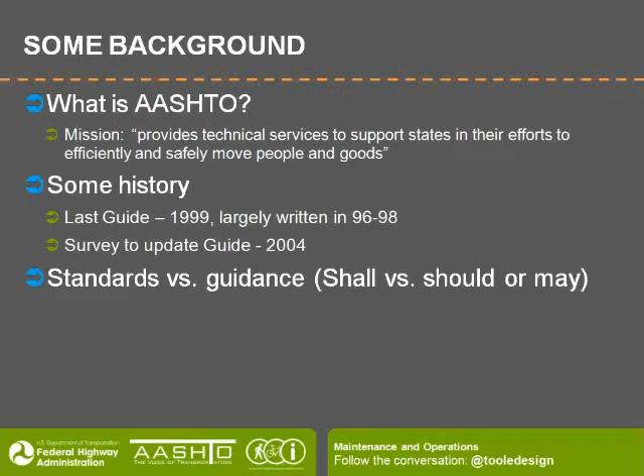Now, the relationship to other manuals: the MUTCD, Manual of Uniform Traffic Control Devices, provides guidance and standards on signs, signals, and pavement markings. And much of this, as they relate to bicycle facilities, is incorporated into the 2012 AASHTO Bike Guide. So they are compatible with each other. AASHTO Guide does elaborate on a number of design treatments. And AASHTO does not get out in front of the MUTCD on signs, signals, and pavement markings. For that reason, there are some new treatments that have not yet been approved by FHWA that aren't in the guide.

And the PROWAG guide is worth mentioning. It does apply to shared use pathways, and Tom will be talking about the proper maintenance of shared use pathways, which is critical to maintaining accessibility. And lastly, the Highway Capacity Manual is another valuable resource. Maintaining pavement quality is certainly a factor that's used in determining level of service, which the Highway Capacity Manual is concerned with.

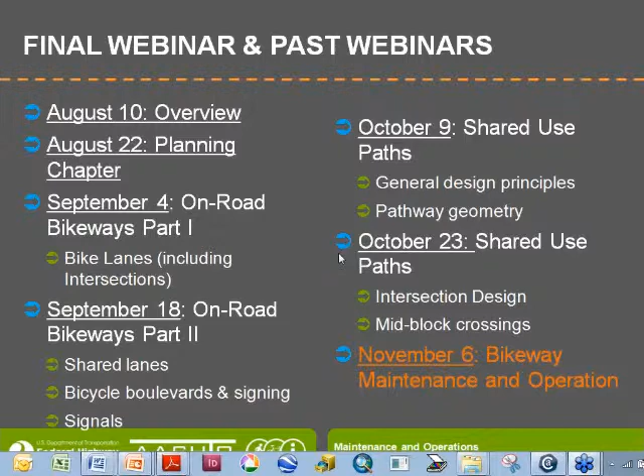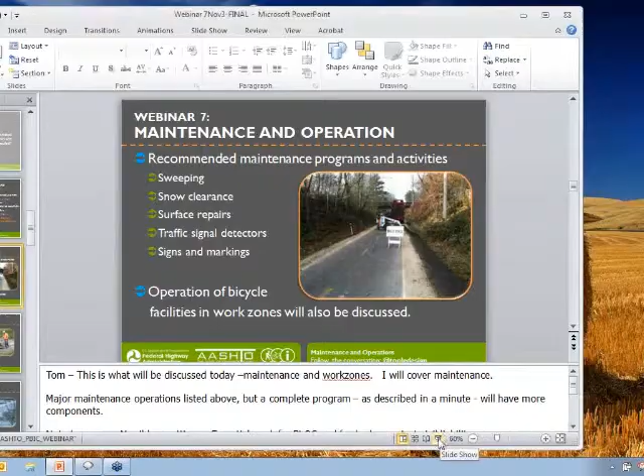Okay, Tom. Okay. Okay, can everyone see my, or Michael and James, can you see my slides? Yes, we can. Very good.

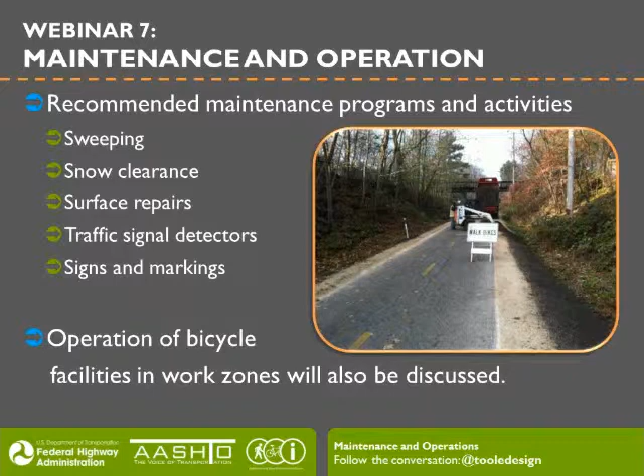These are the last 2 components of a maintenance program, including utility cuts and snow clearance. More and more communities are keeping paths open year-round. That means snow removal in those snow belt states for the bike lanes and the paved shoulders and the paths. Again, this is essential work, but the street departments don't get awards for maintaining facilities through the winter. They probably receive far more complaints than they do compliments.

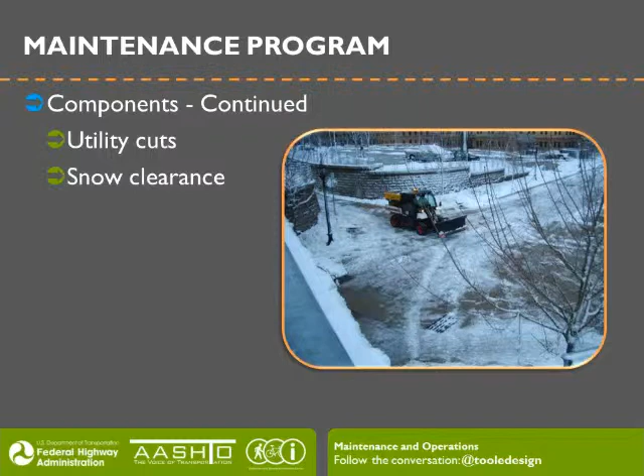So let's go through each one of these components, starting with sweeping. I should note that sweeping is sometimes necessary for light and dry snowfalls as well. But typically it's because debris builds up in the bikeway, or sand and salt, which is certainly a menace. Sand and salt is really kind of a love-hate ordeal for maintenance workers. It's necessary to cut through the ice, but it turns into a problem in the spring when it needs to be collected and removed from a path or the shoulders or bike lanes.

Silt is another problem. It happens where there is poor drainage, and wet silt is especially slippery. I think it's just about as slippery as ice is. Regarding fallen vegetation, leaves falling on a path in the fall can produce a really nice photo, but again, they are very slippery when they're wet and they need to be swept off of a path.

So here are the solutions. You can establish a regular sweeping program, and the AASHTO guide recommends that. Along with that, you should have a reporting system in place as well. And the less regular your sweeping program is, the better that reporting system should be.

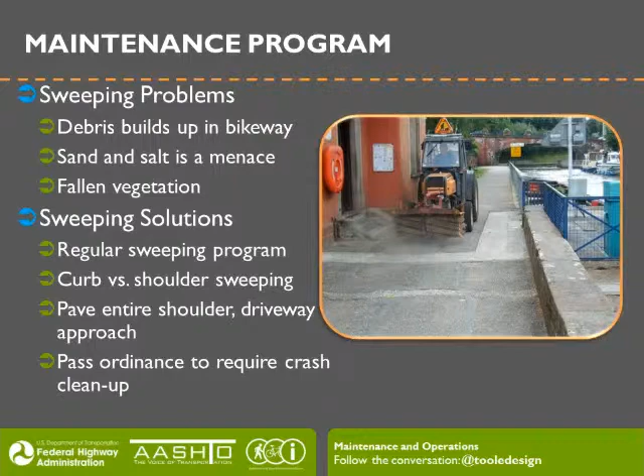Lastly, the guide talks about the need to perhaps pass an ordinance that would require wreckers that haul away the remains of crashes to clean up after the crash itself, so that there's a lessened amount of debris.

Moving on to surface problems, these are likely to present some of the most serious hazards for bicyclists. These problems extend beyond bikeways and include paved shoulders and travel lanes. Longitudinal cracks, for example, may present a very serious problem to a bicyclist, but not to motorists in roadways or bike lanes.

The main surface problems include cracks, potholes, and bumps. Often the pavement just deteriorates over time - that will eventually happen. So surface repairs start with an inspection and reporting system and often end with patching, grinding, and spot pavement replacement. If you're starting up an inspection and reporting system, it's very critical to be emphatic about the importance of that system. That goes hand in hand with any maintenance program.

If you use good construction standards, you can avoid or significantly delay the onset of problems. Design has a place as well - it can really reduce the cost of maintenance in the future. For instance, if you design a roadway and keep that joint out of the bike lane, there will be far fewer reported problems in the future.

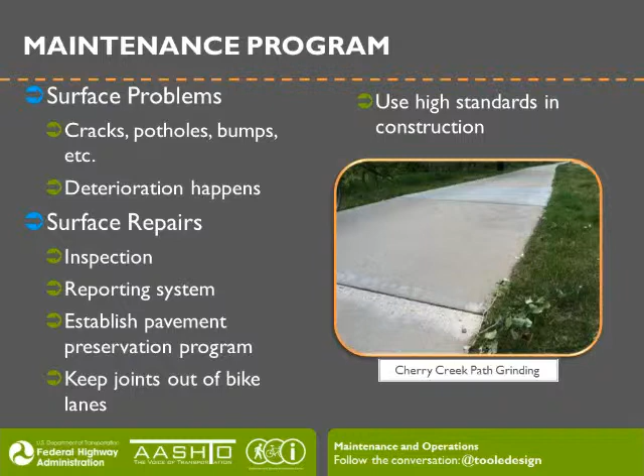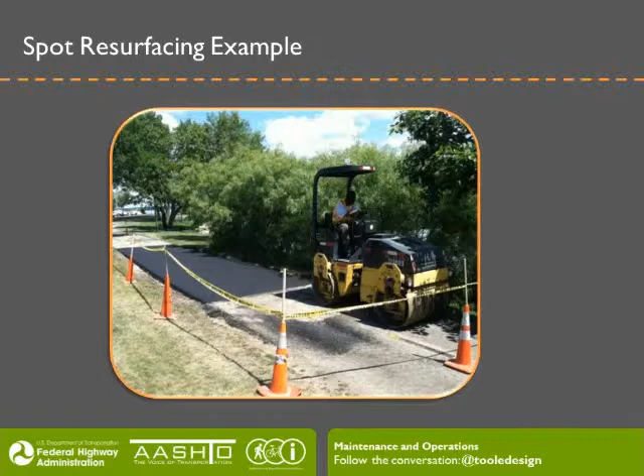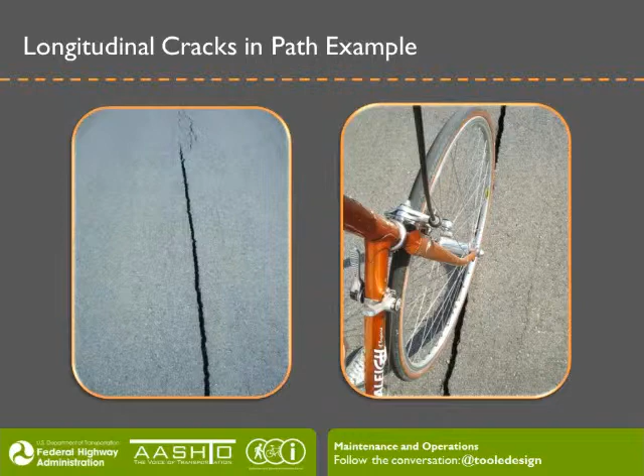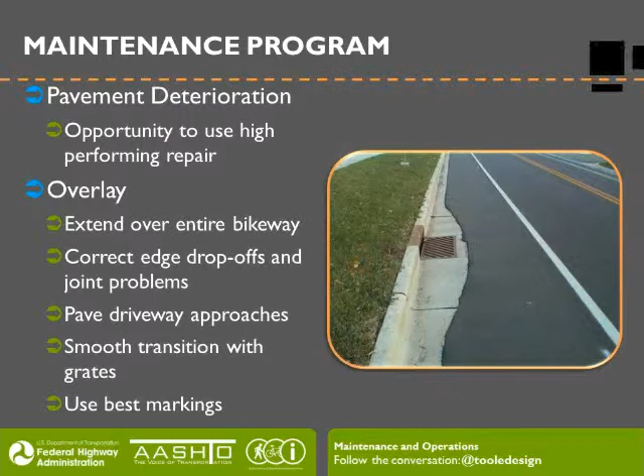Moving on to simple pavement deterioration, this tends to be a significant problem, but it's also an opportunity to use a higher performing repair. Overlays provide this excellent opportunity, but keep these tips in mind: extend the overlay over the entire bikeway, correct the edge drop-offs and joint problems, pave the driveway approaches if they're in gravel, ensure smooth transitions between the grates and the surface itself, and use this as an opportunity to use the best markings you can afford at the time.

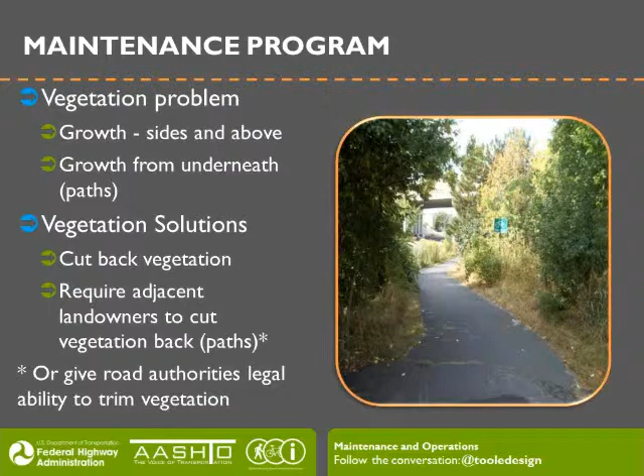Vegetation encroachments seem minor, but they can present serious hazards, often impacting bicyclists on shared use paths. Maintaining authorities are typically pretty good at keeping vegetation under control on highways themselves. Growth comes from both sides and above, but it can also come from underneath the pavement. Solutions are simply to cut back the vegetation or require adjacent landowners to do so. One problem impacting some areas is the authorities' inability to trim vegetation if the source is from private property, so you may have to give authorities legal ability to trim the vegetation, as suggested by the guide.

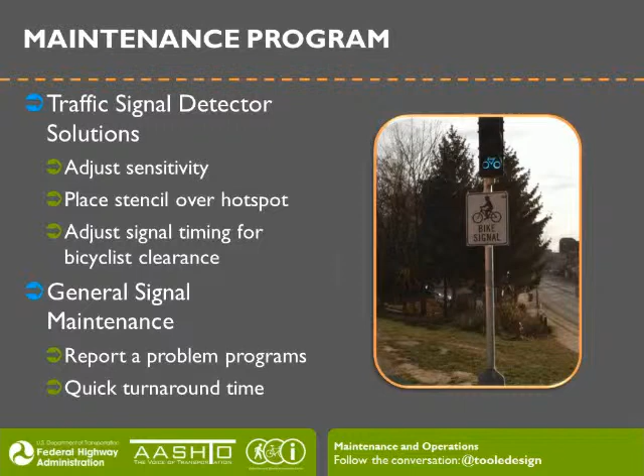Signs and markings also require maintenance, and here are some of the solutions. First, inspection, including testing for retroreflectivity, is necessary. The solution is replacing signs and markings routinely. For markings like crosswalks and long lines, when overlays are done or a street is reconstructed, use the best marking material available.

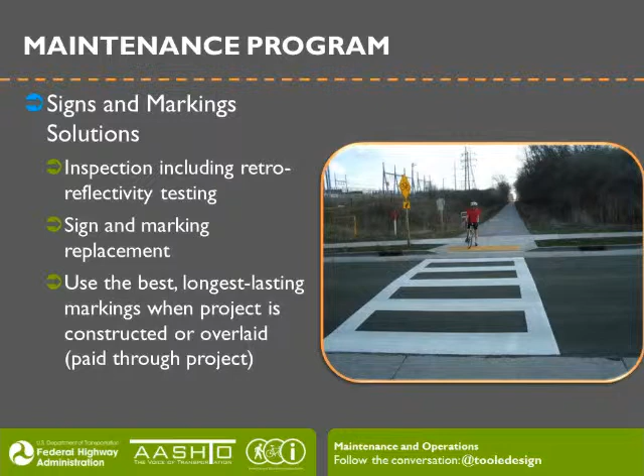Markings are often covered by project funds, constituting just a small part of the project. Meanwhile, maintenance budgets are very tight and often being reduced. So try to get the longest lasting marking material when you have a reconstruction or resurfacing project.

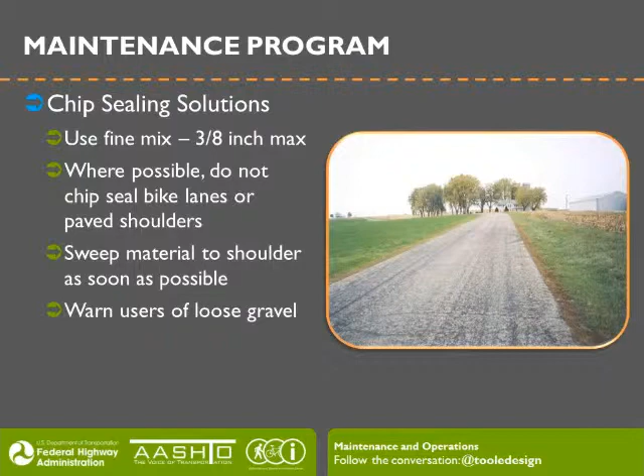Last but not least is snow and ice problems and maintaining paths and other bikeways for year-round use. The issue is usually with snow or ice that remains for more than a couple of days. For example, it was snowing earlier today in Madison, and no one was rushing to remove it because it was melting right away. The problem is with snow and ice that hardens and becomes a safety hazard, or impedes the movement of bicyclists and pedestrians.

So the solutions are to remove the snow and ice, often using salt and gravel or salt and sand to help reduce and remove that ice. Parking restrictions often have to be put in place so you can plow right up next to the curb when you have bike lanes next to parking lanes. And you need a reporting system in place so you can respond to problems and hazards that crop up. That's it.

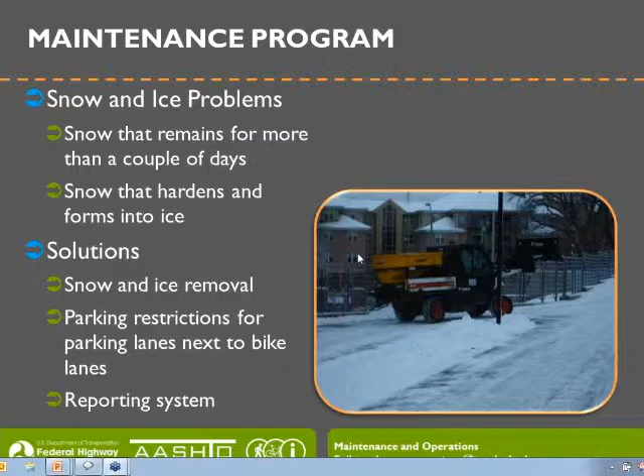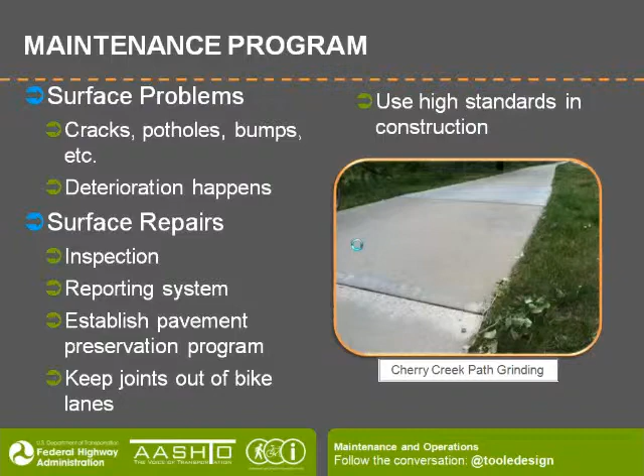Operating bikeways in work zones. This is a part of the guide that has been significantly beefed up, and it cites support in the MUTCD, which has strong language on keeping roadways open and accessible for bicyclists during construction. It's Part 6 of the MUTCD, Temporary Traffic Control. It states that bicyclists should be treated the same as motorists for work zone accommodations, and treatments should be designed to accommodate bicyclists.

Treatments may include temporary lane restrictions, temporary facilities such as paved surfaces, structures, signs, and signals. They may also include detours in certain cases. So operating bikeways in work zones needs to be part of a traffic maintenance plan, which is part of the construction plan for the project.

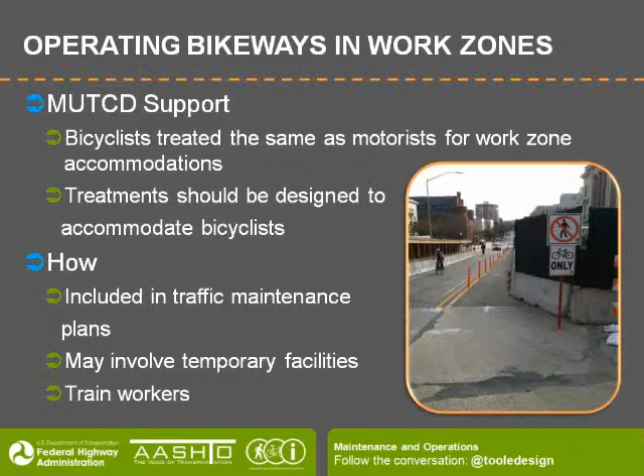In some cases, particularly in large construction areas where you may have flaggers or pilot cars, the workers need to be trained so they understand the slower speeds of bicyclists. I'll get into that in the next slide.

The short of it is, MUTCD and AASHTO guide state that accommodation within work zones is preferred over detouring around them. The idea is that bicyclists should be able to proceed as close to the normal route as practical—they're going to do it anyway, and they're not going to go out of their way. So that kind of detour treatment just isn't going to work in a lot of cases. The idea is to accommodate within the work zone as much as practical.

The guide breaks up work zones into rural highways and urban streets, suggesting different treatments. For a rural highway, treatments depend on the volume and length of the work zone. If it's large, many miles, you might provide room for vehicles to pass, often done with a paved shoulder if one exists. But for shorter or lower volume roadways, you can probably just accommodate bicyclists in lane or use standard traffic control practices.

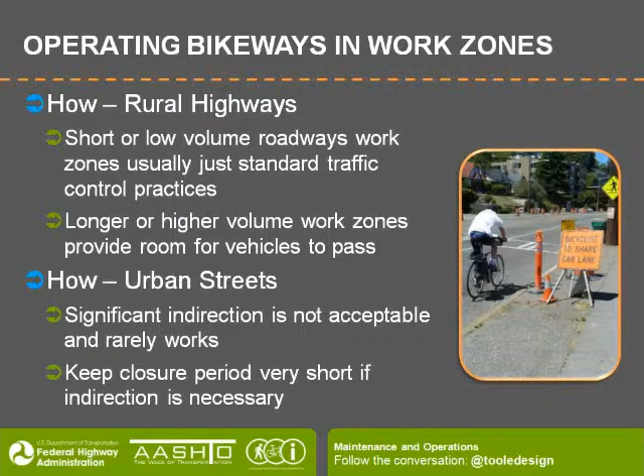In a lot of cases, judgment comes into play, and really understanding the favored routes and destinations of bicyclists is key to figuring out the best treatment for accommodating them in and through work zones.

As far as detours go, this should really only be considered where there's just no way to accommodate the bicyclist in the roadway, either due to high traffic volumes and speeds, or where construction restricts the width of the roadway to such a degree that there's no way to safely allow bicyclists through the area.

So detours, the guide does include a few points. One is that detours shouldn't require bicyclists to make more than one left turn across heavy traffic, so it shouldn't be a zigzag type detour. Where this may occur, it suggests that separate detour routes for each direction of travel should be considered.

Another key aspect is providing advanced warning. Just as you would for motor vehicles, provide signage that allows them to choose an alternative route well ahead, well before the actual construction zone. The same goes for bicyclists.

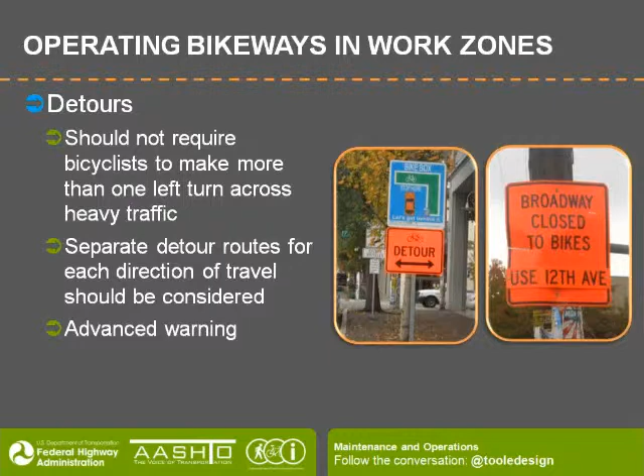And I think that's all I'm going to say on bikeways and work zones, and I think it's a good time to open it up to questions for presenters or for the listeners out there.